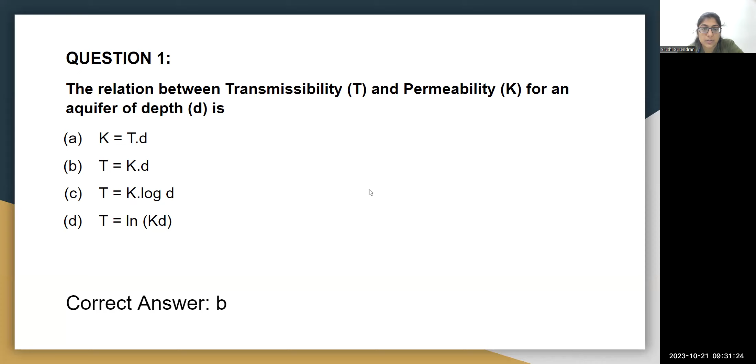You will have to focus on what is the definition of transmissibility. It is the permeability through a portion of the aquifer medium. When you consider the entire aquifer medium and take a portion of it, the capacity of that portion to transmit water is what is transmissivity. So the points of focus would be the definition.

You will have to learn this relationship between hydraulic conductivity and thickness of the aquifer, and also what are the units of this transmissivity component. Its dimensions are in terms of L square by T, where meter square per second, meter square per day, or meter square per hour can be the units.

So problems based on this will be coming, and the relationships also can come. The lecture is also focusing on the coefficient of permeability, which is nothing but hydraulic conductivity. So what is the coefficient of permeability? What are the factors that are impacting coefficient of permeability? Then, what is the permeability?

Permeability depends on the soil texture. So for different kinds of soil with different textures, what is the permeability in different soils, like sandy soil, clay soil, and also based on the arrangement structure of the soil - what is the permeability to different types of soil - is also one point of importance in week 5.

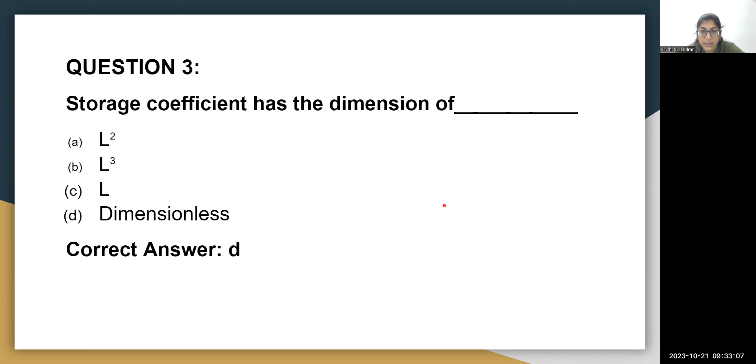Then another important concept is the storage coefficient or storativity. So what is storage coefficient, storativity? The correct definition is the volume of water that is drawn or that you can obtain per unit cross-sectional area of the aquifer per unit drop in hydraulic head.

So if you're taking it in meters, for 1 meter drop of hydraulic head and 1 meter square area of the aquifer, the volume of water that you can get is what storativity or storage coefficient is defined as. You should also focus on confined and unconfined aquifers - what is the storage, how is the definition changing?

Then another concept is the porosity, the amount of pores in the aquifer medium. What is the definition of porosity? What is the mathematical representation of porosity? What is void ratio, and what is the mathematical representation of void ratio? And the relationship between porosity and void ratio - these 4-5 concepts are very important.

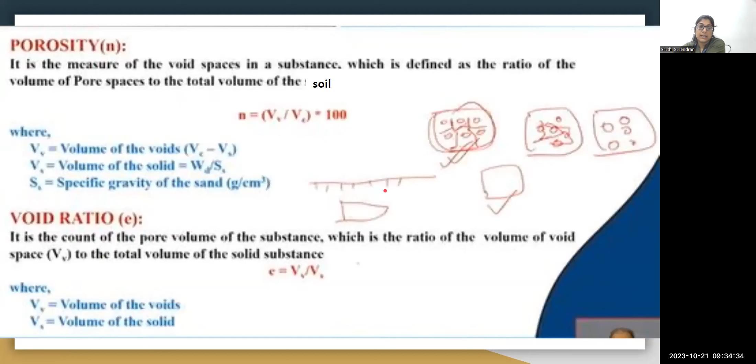The definition of porosity is the ratio of the volume of pores to the entire volume of the soil, whereas the void ratio is the ratio of the volume of pores to the volume of the soil particles alone, not the entire volume, but the soil solids alone. Porosity is represented by N and void ratio by E. How it is mathematically expressed is something you will have to focus on.

Then, what are the factors on which porosity depends? It depends on the shape of the particle, the packing of the particle, and also how well the soil particles are graded or sorted. So questions based on this can come, asking what it is depending on, what it is independent of.

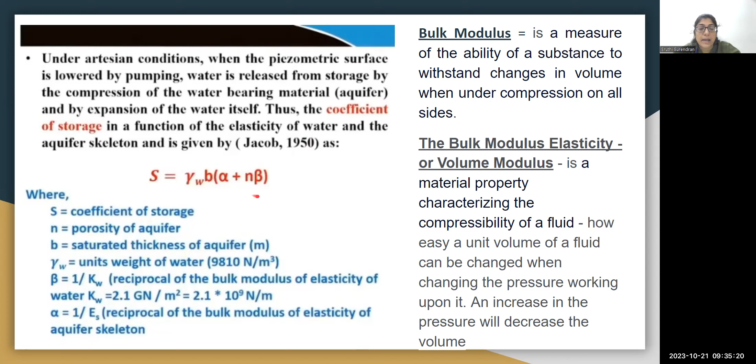Another part is the bulk modulus of compression that comes in connection with storativity or storage coefficient. The storage coefficient is given by a formula, and there are a couple of formulas that take care of storativity, with bulk modulus coming in relation to this equation. So it will be good to have an idea about what bulk modulus of compression is, and what are the values of bulk modulus of compression for different soil materials.

Then problems are a very important part of this chapter relating to transmissivity. They can give the transmissivity and ask you to find the thickness of the aquifer, or they can ask you to find the hydraulic conductivity of the aquifer, or they can ask you to find the transmissibility by giving the hydraulic conductivity and the thickness of the aquifer.

Then problems like these can also come where they'll ask you what is the relation between porosity and the void ratio. n is equal to e by 1 plus e; that is the relationship between porosity and void ratio. Then again, they can ask problems based on this formula. They can also ask you problems to find void ratio by giving the volume of the pores and the volume of the solid particles. So such problems can also come from this portion.

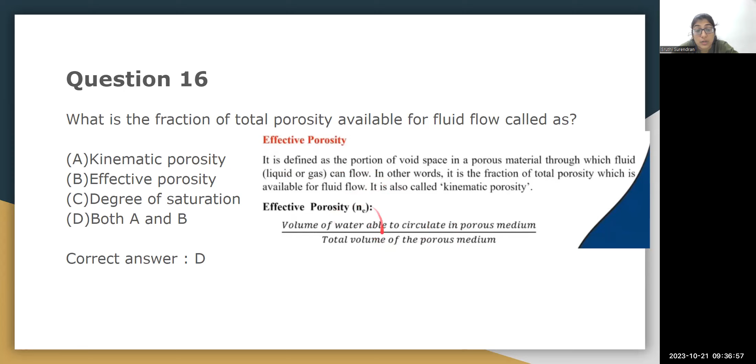Another concept is what is effective porosity, otherwise kinematic porosity. If you consider a part of the porous material, then what are the effective pores? If you consider from the total pores, what is the amount of pores through which water actually flows? That is the basic concept of effective porosity or kinematic porosity. So you will have to focus on the definition and these terms, kinematic and effective porosity.

Then again, how is the permeability varying according to soil texture and soil structure for different types of soil? For sandy soil, for clay soil, what will be the permeability? Will it pass through it easily, or is it not going to pass through it easily? Then there's a portion dealing with the types of permeability and averaging techniques of permeability. Then transmissivity, its definition, unit, relationship, and also problems, and the transmissivity definition in terms of confined and unconfined aquifer.

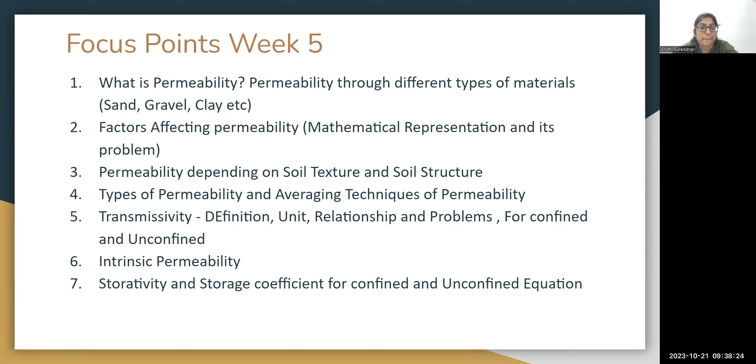Another concept is the intrinsic permeability, so you'll have to focus on that also. Then storativity and storage coefficient for confined and unconfined aquifers. So all these are the focus points of the week 5 lecture. You can use this as a guidance to help you study the week 5 portion.

Moving on to the revision points for week 6. Week 6 is covering portions relating to Darcy's law. What Darcy's law is, I think we have covered in earlier weeks' lectures. So what is Darcy's law? What is the validity of Darcy's law? Darcy's law is only valid for slow viscous flow where the Reynolds number is less than 1, that is, if the flow is laminar.

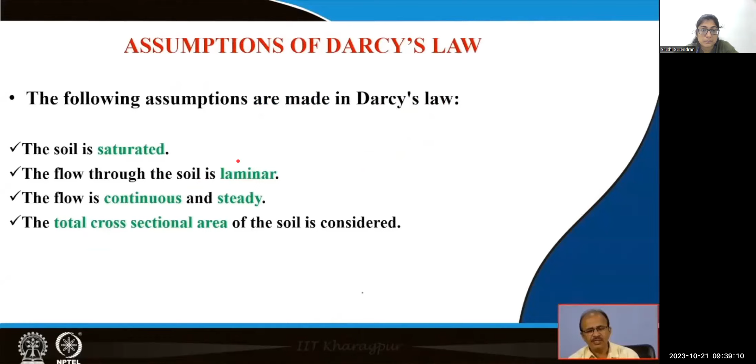So the validity of Darcy's law and the assumptions of Darcy's law are an important part of this chapter. So have an idea about the assumptions considered when we talk about Darcy's law. Such questions can come, asking for the validity of Darcy's law, what kind of flow it is valid for, what kind of Reynolds number it is valid for.

Then there are concepts covering the traveling time of the groundwater and the velocity of the groundwater flow. We know velocity of groundwater flow is given by Darcy's equation. The traveling time of water in groundwater flow is given by this formula: the length divided by the velocity, into porosity. Here the length is always considered in kilometers, whereas the velocity is considered in meters per day. So you might need to focus on the units of this equation.

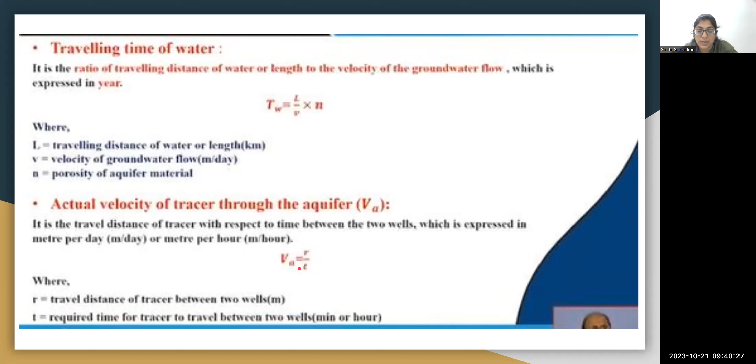Another important equation is the velocity of tracers through an aquifer. This is nothing but distance by time, the distance between two wells. Questions will come where they are passing a tracer between two wells. The distance between the two wells will be given, which will be r, and the time taken for the tracer to travel will be given, which is t, and we will be asked to find the velocity. So this is the type of question I was talking about.

If the distance is given and time is given, what is the actual velocity of the tracer? Then, yes, this is something we covered in the earlier week's lecture, week 5. This is the formula that I was talking about.

Another portion in relation to this, we learned what Reynolds number is in connection with Darcy's law. What is the mathematical representation of Reynolds number? It is inertia force by viscous force. And what is the formula? That is rho Vd by mu, where rho is the density, V is the seepage velocity, d is the grain size of the aquifer material, and mu is the dynamic viscosity. You need to be familiar with this formula and this representation. Questions and numericals are highly likely to come from this portion.

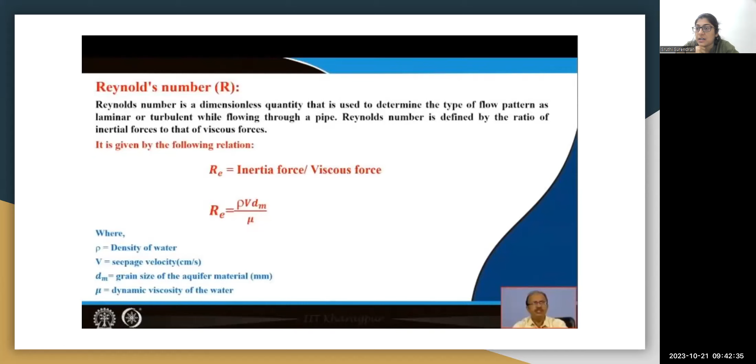Check the validity of Darcy's law for a flow where the dynamic viscosity is so, the seepage velocity is so, and the grain size of the material is this much. Such questions can also come.

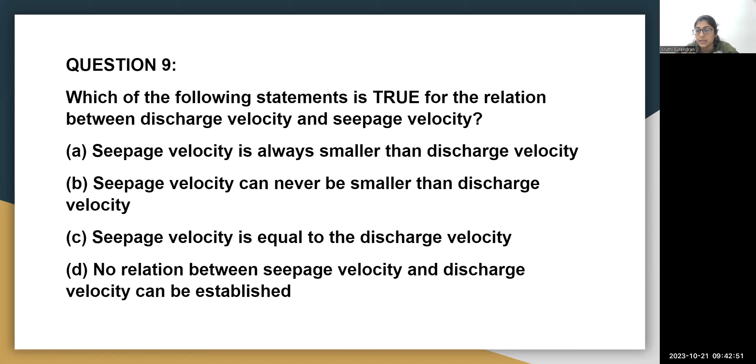Another thing in focus in this week's lecture is the seepage velocity. We know discharge velocity is computed using Darcy's law. Seepage velocity is the discharge velocity divided by the porosity. When we consider the entire cross section of the aquifer, we get the discharge velocity, whereas seepage velocity is the velocity of water flowing through a single pore or a connection of pores. So the seepage velocity is greater than Darcy's velocity because the cross-sectional area is smaller.

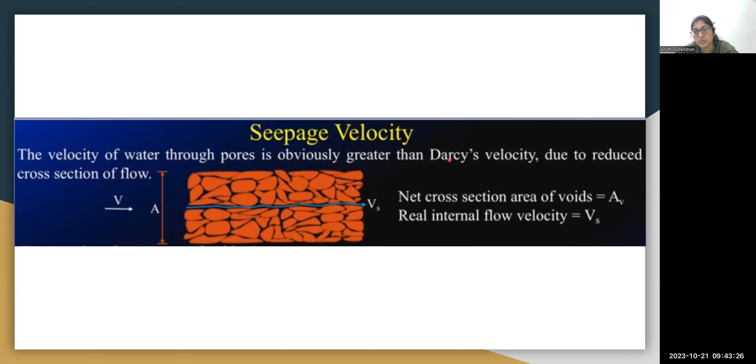Again, what are the coefficients of permeability for different types of soil? It ranges from 1 into 10 to the power minus 6 to 100 centimeters per second. So how does it vary? Even if you don't know the exact range, in what order it varies is something you might have to focus on in this week's portions.

Another important portion is the total energy of water. Total energy of water is the sum of the pressure energy, elevation energy, and kinetic energy. Pressure energy is the head of the water as a result of the pressure. Elevation energy is the height of the water column as a result of its position. And kinetic energy is the energy of the water as a result of velocity. So what is pressure energy? What is elevation energy? What is kinetic energy?

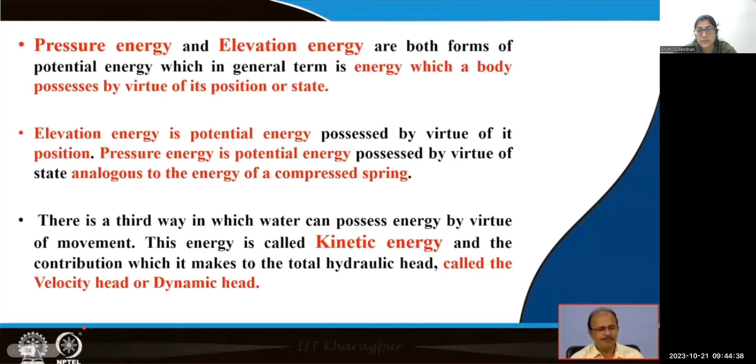Another thing is the other names for these. Elevation energy is also called datum head, and kinetic energy is also called velocity head or dynamic head. Pressure energy is also called pressure head. Questions like these: energy possessed by virtue of its position or state. By virtue of position, it is called elevation energy, and energy possessed by virtue of its state is called pressure energy. This is the mathematical representation of the total energy of water in terms of head.

Kinetic energy is given by V square by 2g. Pressure energy is given by P by rho g, and elevation energy or datum head is given by Z, which is the elevation of the water, I mean, the bottom of the water body. If you're considering a total height of h, the level of the water at the bottom from the mean sea level will give us the elevation energy.

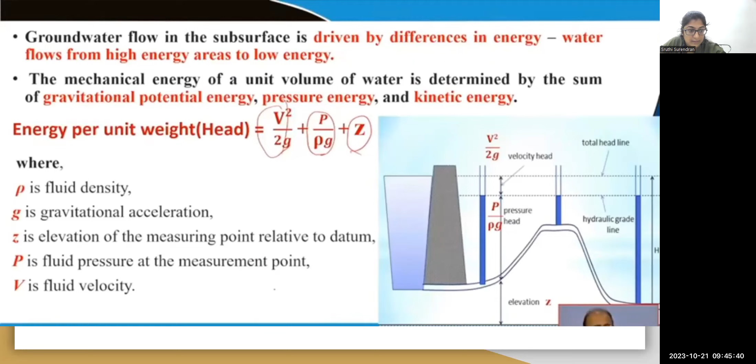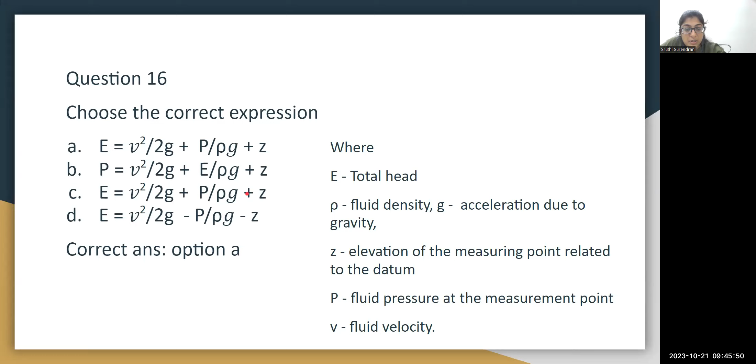So questions like this will come where they are asking you to choose the correct expression for total energy of water. Now, another portion in connection with this is the hydraulic head. Now we learned about pressure head, elevation head, and kinetic head. Hydraulic head is nothing but the sum of the pressure head and the elevation head together. So let's go back and talk about hydraulic gradient.

Hydraulic gradient is nothing but the change in the hydraulic head divided by the length of the flow. So you have to know what is the difference between hydraulic head and the pressure head. Hydraulic head is a sum of both of this. Pressure head will be just this.

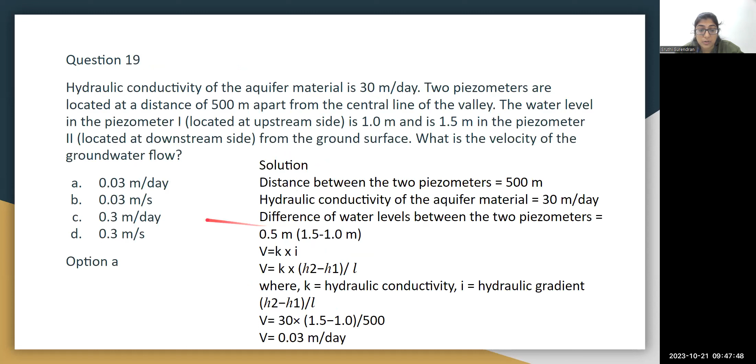And also problems relating to traveling time of water. They have given the porosity and the distance, and asked us to find the traveling time. So here the velocity was found out earlier from this question, and in continuation with that, we have been asked to find out the traveling time. So another important thing is this 30% should always be converted to 0.3, and also take care of the units.

Like I said, for traveling time, normalize all the units, bring it to one unit, kilometers to meters. If they have asked in years, make sure that the velocity component, which is giving us meter per second, is converted to meter per year.

Again, we talked about what is intrinsic permeability in the previous chapter. So again, what is intrinsic permeability? It is nothing but C into D square. D is the grain size, and C is representing all the other factors on which the permeability depends, that is the geometrical properties of the porous media.

And Darcy: this K expressed in centimeter square is very small. So there is a unit exclusively for this, which is called 1 Darcy. So what is the relation between the Darcy and centimeter square, and what is the relationship of intrinsic permeability with coefficient of permeability, are two very important factors that you will need to focus on.

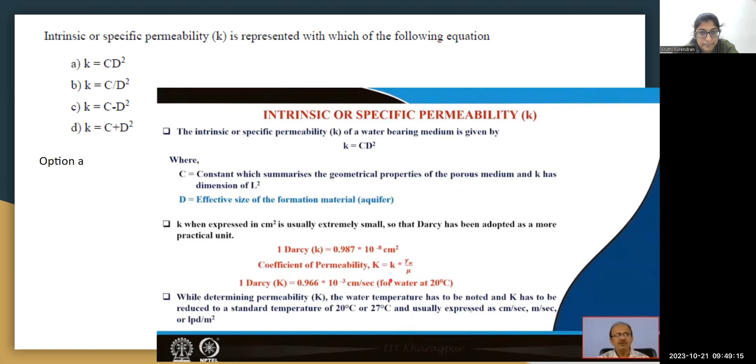So summarizing this week's focus points, it will be water movements. What is hydraulic head? What is pressure head? What is kinetic head? Datum head? What are the factors affecting permeability? Velocity of water during groundwater flow, as well as seepage velocity, the travel time of tracer, the actual velocity of tracer. All the formulas and problems are important.

Then Darcy's law, validity of Darcy's law. What is the mathematical representation of Darcy's law? What are the assumptions in Darcy's law, and the problems related to Reynolds number are important. Then there are empirical formulas to find out the groundwater velocity. You can go through the lecture material for that.

And also confined and unconfined aquifers, problems relating to finding the discharge through aquifers. What is the value of drawdown? What is the radius of the well? What is the radius of influence? Etc. So this portion is being covered in next week's lecture also. So we'll just see what all are that. Even in this chapter, there are portions talking about the 6th point.

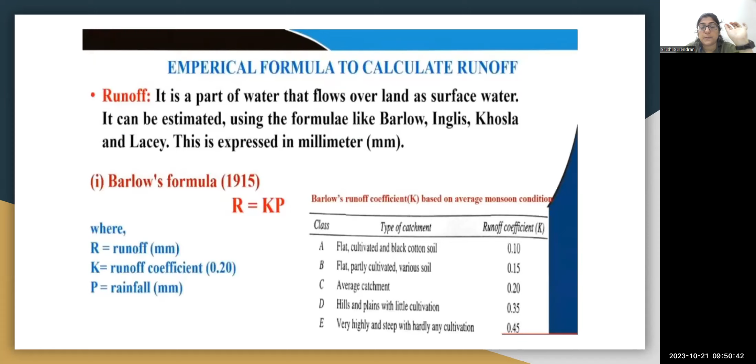So moving on to the 7th week, they're focusing on some hydrological components like the runoff. So what is runoff? What are the empirical formulas to calculate runoff? Formulas like Barlow's formula are all empirical formulas. So special focus on the units. Barlow's formula, Inglis's formula, Khosla's formula, Lacey's formula. Be familiar with all of those, and also the units in which all the quantities are represented.

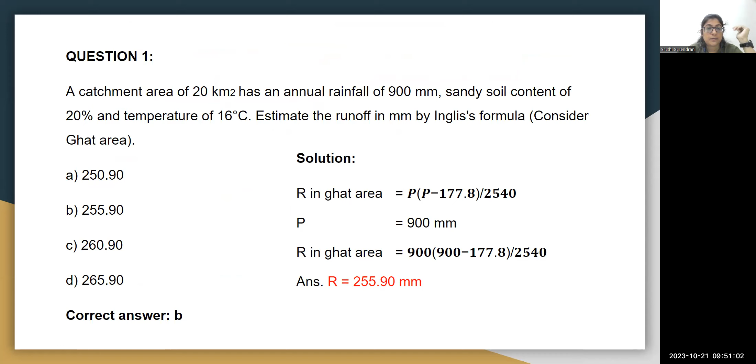Problems can come from this, asking you to estimate using Barlow's formula or Inglis's formula by giving the respective data. Then this was what I was talking about. You need to have an idea about what is drawdown. Drawdown is the height of the actual water table from the initial water table, from the initial water table to the present water table.

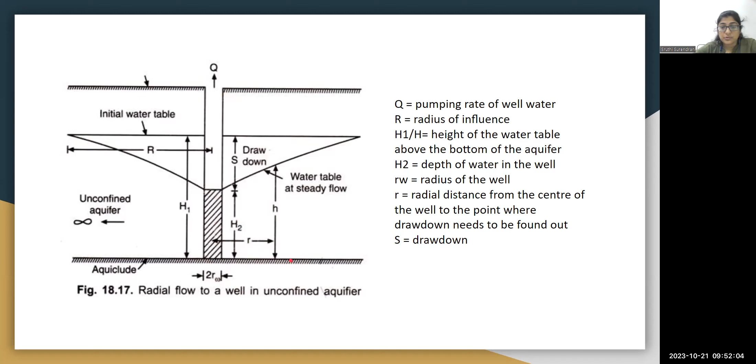Then what is radius of influence? What is the total height? What is the pumping discharge rate? Where is the radius of the well coming, and the distance of the center of the well from another well will be provided. So that value is going to be small r.

So here is a problem that can come in relation to it. They'll give you the radius of the well. They will give you the distance of a well from the center of the pumping well, another well from the center of the pumping well, which are R1 and R2. They'll give you the height of the water level, actual water level.

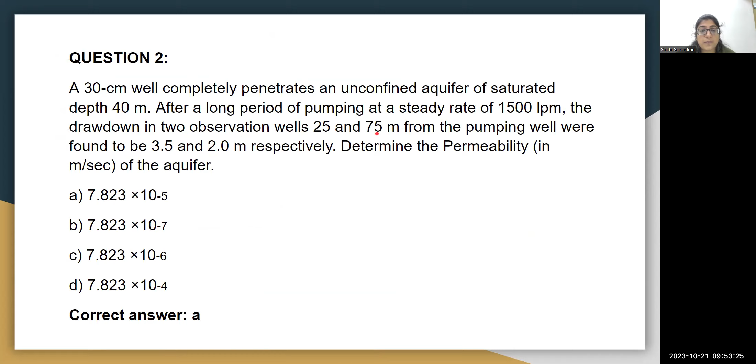This is for unconfined aquifer. For confined aquifer, the formula is different. So please be familiar with this concept. A problem relating to this is pretty sure to come. So this is the kind of problem that can come. The discharge is given, drawdown is given, the distance of the observation wells are given. They have asked to find the coefficient of permeability.

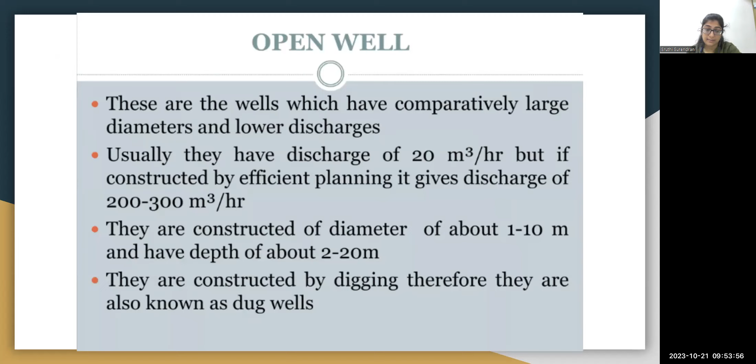Another important point of focus in this week 7 is the different types of well. What is a well? What are the classifications of well, open wells and tube wells? What are the discharge rates and the diameters and depths of open wells generally? What is the classification for open well, shallow open well and deep open well?

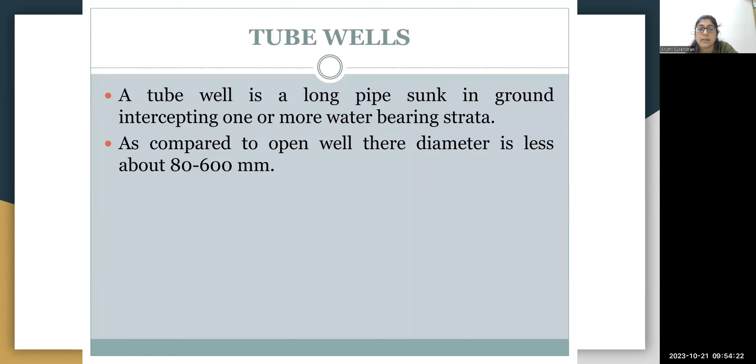What is the shallow open well? Shallow open well is when the well ends in the water bearing strata itself, and deep open well is when it ends in the impervious strata called mota layer. Then again, what are tube wells? Generally, what is the discharge in tube wells? And what is the diameter of tube wells?

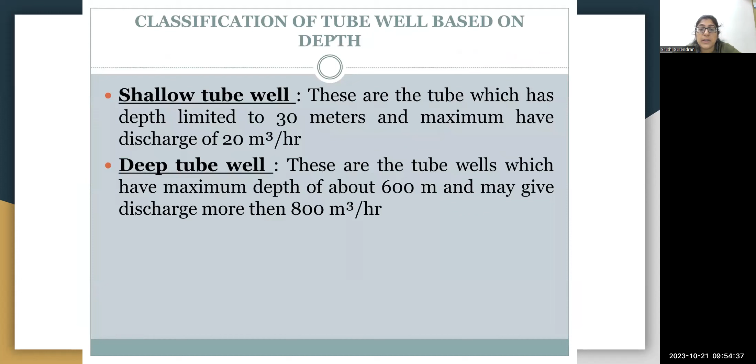What are the classifications of tube wells, shallow and deep tube well? Again, what will be the discharge for shallow and deep tube well? What is going to be the depth of shallow and deep tube well? Have in mind all these values. Also, there are other types of well like bored well, driven well, and jetted well also talked about. So have an idea about what they are; the dimensions of the diameter and depth will be something that you might need to go through.

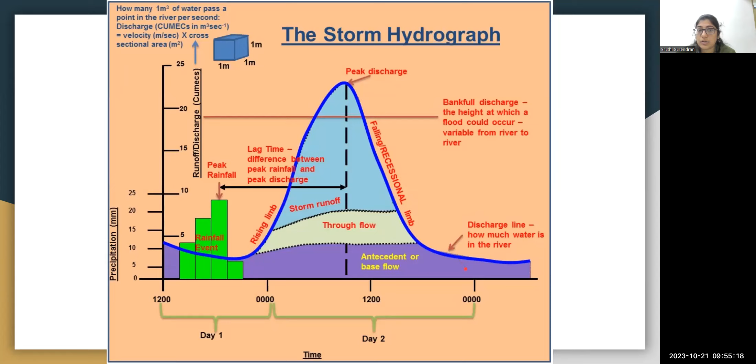The next concept in here is what is a hydrograph. Hydrograph is the discharge versus time graph, which is helping us estimate the direct runoff. And hydrograph has got various components like rising limb, peak discharge, falling limb. All that is given in the lecture series, so please do go through all that. Questions like what is this plot called can come.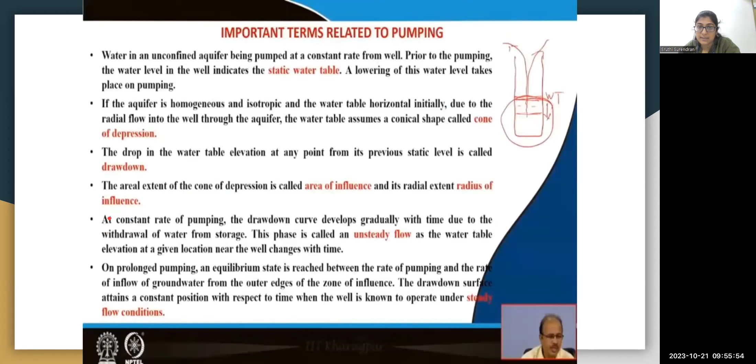So again, week 7 focus points are runoff, empirical formulas for the estimation of runoff, hydrograph components, types of wells and the specifications, and the steady flow in confined and unconfined aquifers. Week 6 and week 7 both have topics related to it. So these are the focus points in these week 7 lectures.

Now moving on to the 8th week's points. The 8th week is covering portions related to rainfall. So what is precipitation? What are the different types of rainfall classification? What are the different types of precipitation classifications? It can be snow, it can be rain, it can be sleet, hail, whatever.

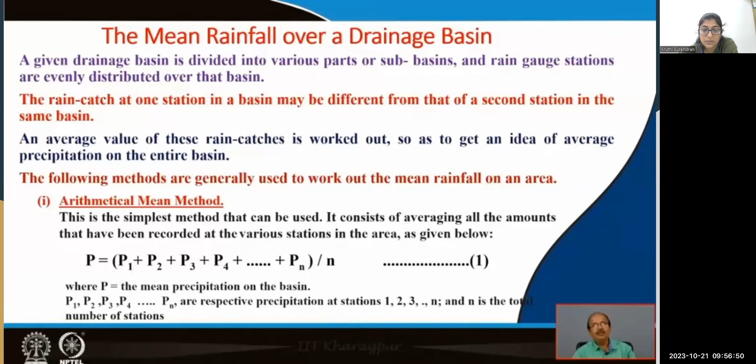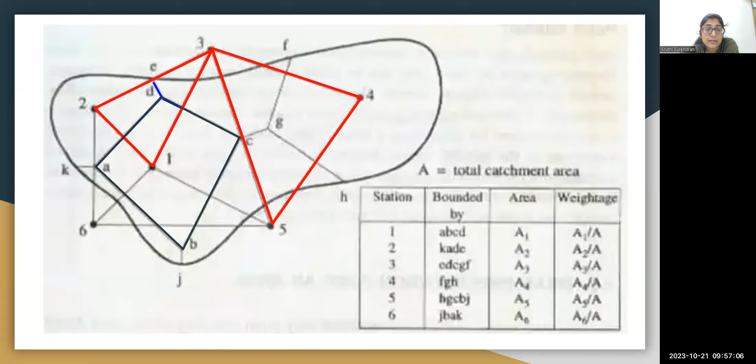So one portion that is majorly covered here is how to estimate the mean rainfall over a basin, using 3 methods: the arithmetical mean method, Thiessen polygon method, and isohyetal method. If you have access to these slides, you can see what the Thiessen polygon method is and what the isohyetal method is. Out of these 3 methods, which is the best method, you'll also have to know. Then problems relating to this can come, like which is the most accurate method, and they can give you 4 or 5 rainfall values, the areas between isohyets, and ask you to find out the mean rainfall.

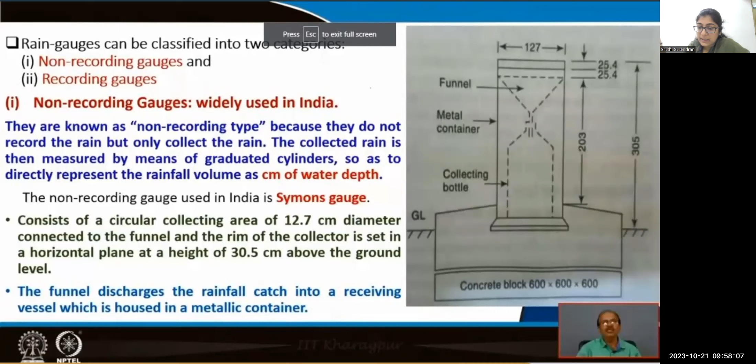Another important portion is the gauges, that is measurement by gauges. That was empirical equations to calculate the mean rainfall, average rainfall. Here they're talking about how to measure rainfall. So there are 2 major types of rain gauges: recording gauges and non-recording gauges. Symons gauge is the non-recording gauge that is talked about in this. And what are the specifications of it? The diameter, the funnel that is used for collecting the water, the collecting bottle, all that.

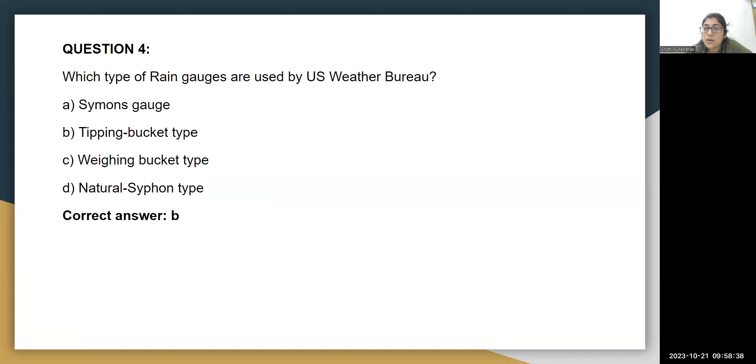Then the 3 types of recording gauges: tipping bucket, weighing bucket, and natural siphon or floating type. So what are all those? What is a tipping bucket? What is the floating recording type? What is a weighing bucket type? All of this is important that you go through. They can ask you questions like where it is used and in which kind of rain gauge recording is possible. All of these recording gauges make a record of the mass curve of the rainfall, that is accumulated rainfall. This is about the weighing bucket type, and this is about the natural siphon type.

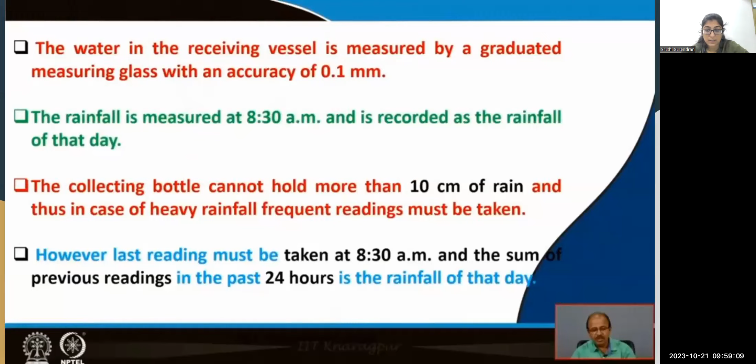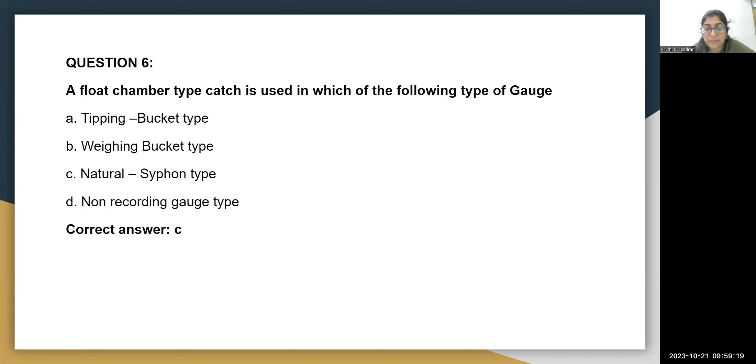Now, another important point is the period of measurement of rainfall when it comes to non-recording gauges. It is taken at 8:30 a.m. From 8:30 a.m. one day until 8:30 a.m. the next day is how the rainfall is measured. The 24 hours of rainfall for that day is measured in this way. So questions related to these recording gauges are sure shot. There is at least one question going to come from that portion. So have an idea about it.

Another portion that is being covered here is what an average annual rainfall or normal annual rainfall is. When we take it for 1 year, it is called annual rainfall. When you take it for 30 years and find the average of all the 30 years' annual rainfall, we call it average annual rainfall. That is one standard value with which all the other rainfall, small time series, that is daily values or annual values, are compared. So average annual rainfall or normal annual rainfall is the rainfall taken for a period of 35 years or 30 years. Based on this you can find the index of wetness, which is nothing but the ratio of the annual rainfall to the average annual rainfall.

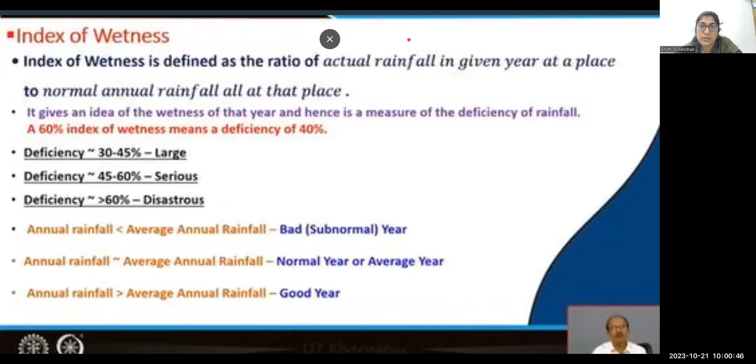So based on the index of wetness, we can find out if a year is a good year, a bad year, or a normal year, because if the annual rainfall is less than the average annual rainfall, then this will be the representation of that year in terms of rainfall. Also, deficiency can be found out. So this is another important concept here, the average annual rainfall, also called the normal annual rainfall. Okay, and index of wetness is a quantity that is used in relation to this average annual rainfall. So questions like this can come based on this data over here. This is one question that is discussed.

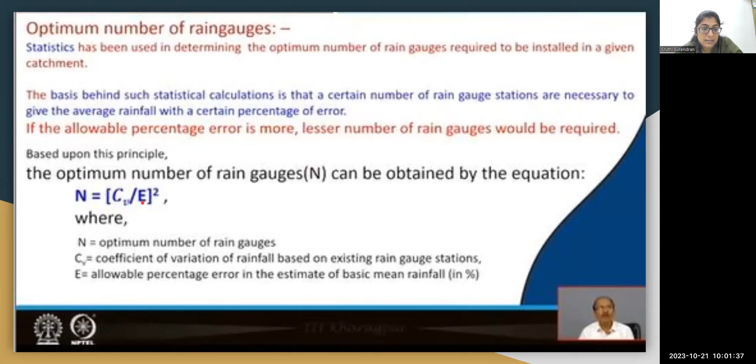And they'll ask you to find the optimum number of rainfall gauges. The question will be like this. They'll give you a certain amount of gauges. Now, how many more gauges should be placed there? So if the optimum number of gauges is 9, and if only 5 rain gauges are there, then 9 minus 5, 4 more rain gauges has to be placed there.

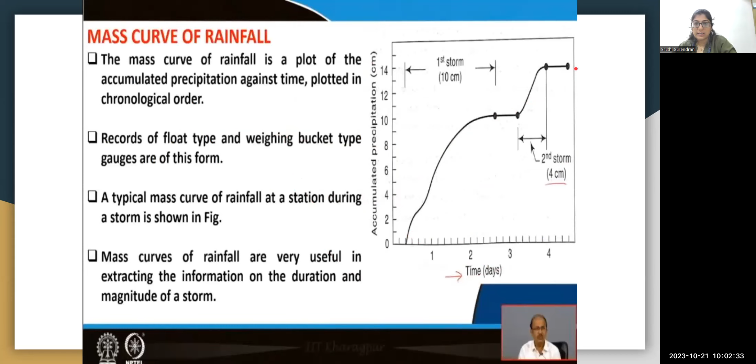When the actual rainfall is greater than the actual infiltration rate, what will be the infiltration capacity? Or the actual rainfall is less than the infiltration rate, what is going to be the infiltration capacity, and how is runoff related to this is one important part of this week's lecture.

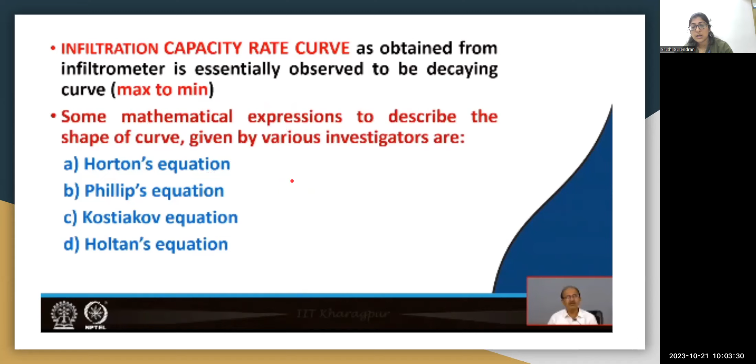So there are various equations that are used for computing infiltration rate: Horton's equation, Phillips equation, Kostiakov equation, Holtan's equation. You can study the equation. Problems can come relating to that. This is Horton's equation.

So summarizing, week 8's lecture is covering what is rainfall, what are the different formations of rainfall, that is orographic precipitation, cyclonic precipitation, what is all of that. What are the different forms when the rainfall's intensity, what is it, light rain, heavy rain. Then based on the size of the drops, what rain is it? Is it a drizzle or it is a big droplet or whatever? All of that is covered in this portion.

Measurement of rainfall, we saw recording, non-recording gauges. Estimation of mean rainfall, we saw arithmetic method, Thiessen's polygon, and isohyetal method. Estimation of missing rainfall is some portion I think we didn't cover, but do go through that. Then index of wetness and normal rainfall.

Design of rain gauge network, we checked that table. Then the optimum number of rain gauges is one important part. Infiltration: what is infiltration, infiltration capacity, the relationship between infiltration and rainfall intensity, infiltration equations.

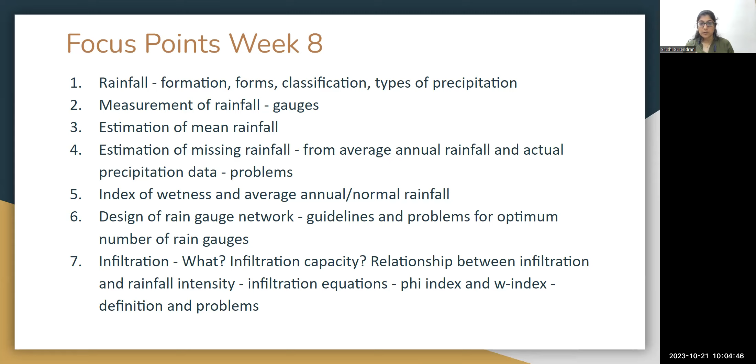Another thing we had discussed during the problem sessions as well is the phi index and the W index. So what is phi index? What is W index? What is the formula? Problems. All this do go through.

Moving on to the 9th week, it is covering about groundwater recharge techniques. So groundwater can be recharged naturally, artificially, or induced recharge can be given.

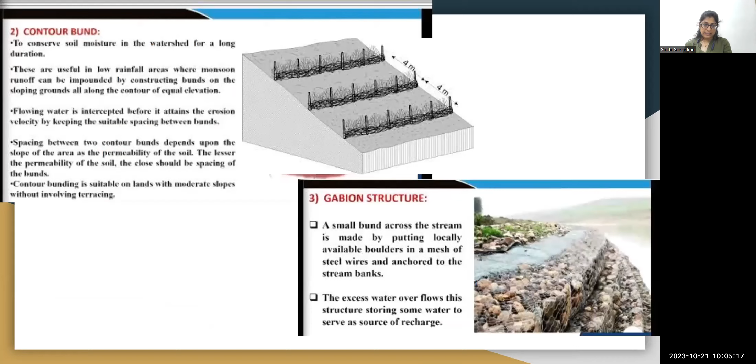So in this portion, firstly, they discuss about natural ways to recharge groundwater through gully plugs, contour bunds, gabion structures. What are all of these? You should have an idea, because they'll give a description of that and they'll ask you what kind of natural recharge technique is it. Is it a gully plug? Is it contour bund? Or is it gabion structure, or is it a check dam, groundwater dams, or dug well recharge? So these are some natural ways to recharge groundwater.

Here, which of the following is constructed across small streams having gentle slope? It is check dams. So do go through what are these structures and where they are given.

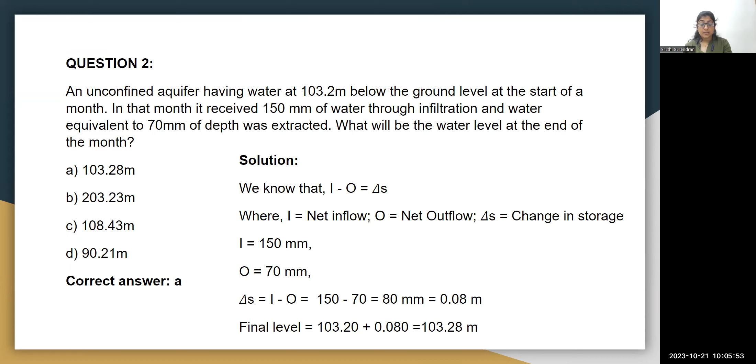Then another question is the groundwater recharge estimation through 2-3 methods: one is the groundwater balance method, rainfall infiltration method. So problems relating to that can come. You can be familiar with the formulas: groundwater level fluctuation method, groundwater balance method, and rainfall infiltration factor method to estimate groundwater recharge, not groundwater flow, groundwater recharge. So problems relating to that can come. This is one such example of the problem.

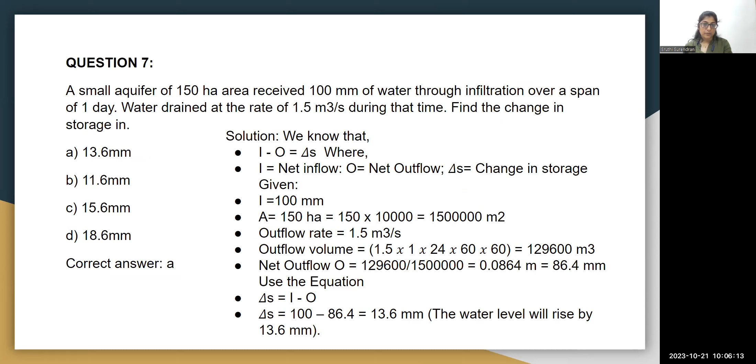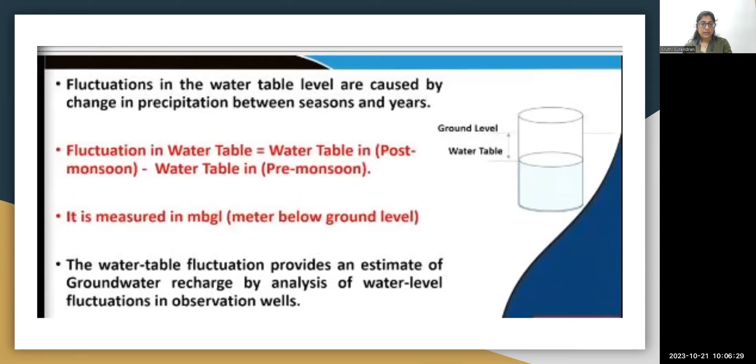Another example of the groundwater level fluctuation method. Another concept covered is what is this fluctuation? It is the water table in the post-monsoon period minus the water table in the pre-monsoon period, measured in meters below ground level. Questions relating to that were also discussed.

Then about what are the groundwater resources in a country, which administrative unit takes care of the assessment of groundwaters. It is the Central Groundwater Board as well as the boards in the state governments. What is the total annual groundwater recharge? What can be extracted? What can be used? How much is used for irrigation and domestic purposes? This portion always has a question from it, so do be familiar with this portion.

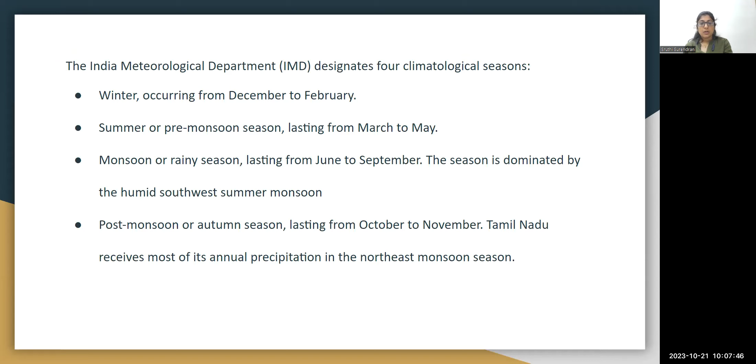Then again, what are the rainfall seasons in a country? The southwest monsoon and the northeast monsoon. What is the period of those rainfalls is also important to know. We have winter, summer, monsoon, and post-monsoon. Winter is generally from December to February. Summer is from the middle of March till May. Monsoon is from June to September, and post-monsoon, the autumn season, is from October to November.

What is the calendar groundwater year? It is 12 calendar months beginning with the commencement of the predominant monsoon. So what is a groundwater year? What does groundwater assessment year mean?

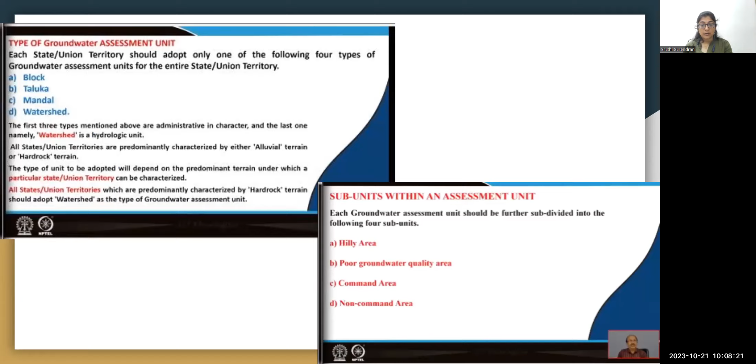Then what are the types of groundwater assessment units? It's divided into block, taluka, mandal, and watershed. Then what are the subunits? Again, hilly area, poor groundwater quality area, command area, non-command area. What are all these subunits? You just need to have an idea about what all these terms mean.

And again, the categorization of the command and non-command area is under safe, semi-critical, critical, and overexploited. So what are all these is something you might have to focus on. We discussed all about groundwater resources in India, natural ways to recharge, estimation of groundwater recharge through three methods, groundwater assessment units, subunits, and its categorization.

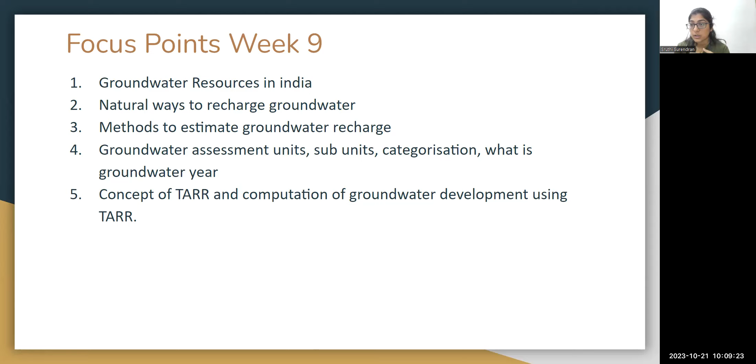Another concept covered in the week is TARR, total annual replenishable recharge, and computation of groundwater development using TARR. So what is TARR? There are 6 steps or so in computation of total annual replenishable recharge. In that, they ask how to find the net draft, how to find the groundwater development. There are small formulas for all that, so you can focus on that as well.

Moving on to the 10th week. The 10th week covers groundwater management techniques like scientific management of groundwater resources, classified into supply side and demand side. So what are supply side measures? It takes care of the supply of water, what is the maximum quantity of groundwater we can extract without affecting its availability or affecting the resources. Demand side takes care of preserving, protecting, and controlling the amount of water provided.

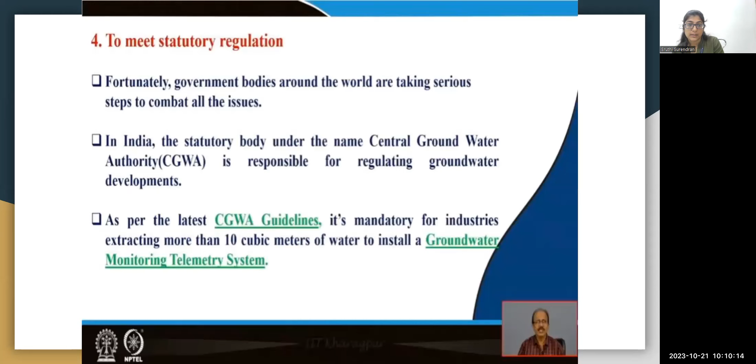So what are the objectives of supply side measures? There is also the portion covered on the need for groundwater management techniques, so questions related to that can come. Then, what are the major sources?

Another important area is the watershed classifications. What is a watershed? What is a sub watershed? What is milli, micro, mini watershed based on area? They'll give you the area and ask which of this is micro, which is mini, which is sub watershed.

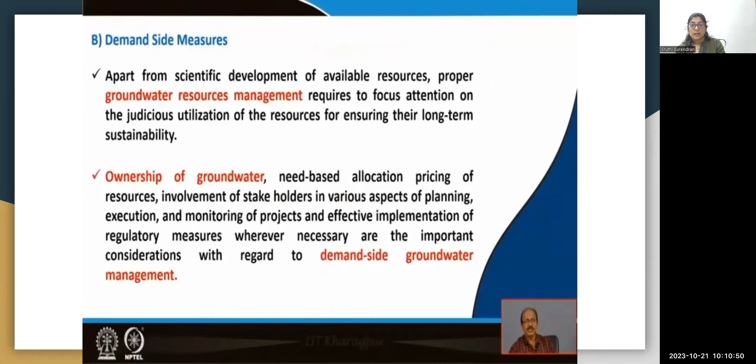So here again, what are the demand side measures? It is ownership of groundwater involving stakeholders, proper monitoring and implementing, proper pricing of water. All these are demand side measures. They'll ask about all of these and say what kind of measure it is - a supply side measure or a demand side measure?

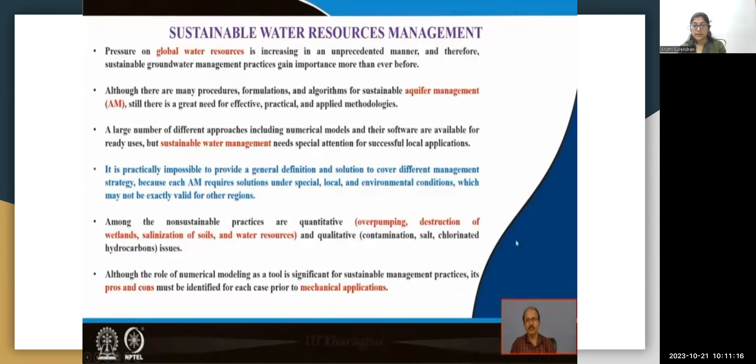Then again, another term introduced here is sustainable groundwater resource management. What is sustainable resource? What are non-sustainable practices? What are the practices that come under non-sustainable practices? You can go through it, questions related to that can come. Then these are some of the questions coming with respect to sustainable use of water.

Then another portion covered here is management of groundwater through artificial recharge, or what are the different techniques of management of groundwater.

So we studied about scientific measures in management of groundwater. How can groundwater be managed? Through artificial recharge, conjunctive use of surface water and groundwater, interbasin transfer, intrabasin transfer, indirect or induced recharge, and control wells. These are some methods in which groundwater management can be implemented, so you can go through all of that.

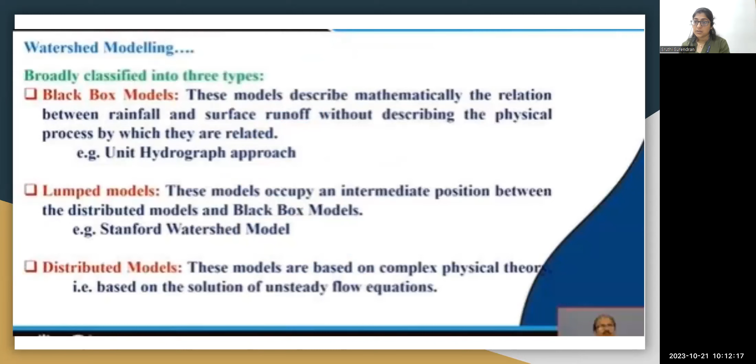Then what is watershed modeling? What are the classification steps involved in watershed modeling? What are the classifications of watershed models and examples of it? Another concept covered is the integrated watershed management approach - what is the concept, what are its objectives, what strategies are adopted in integrated water management. Go through all of that, a question is likely to come from that.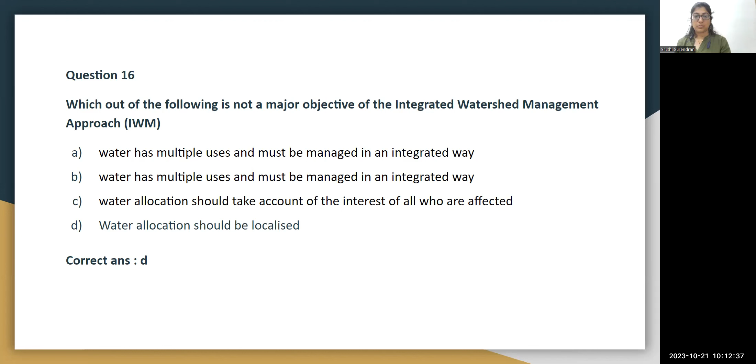So there are a lot of questions being discussed in the problem solving session as well as in the assignments that are covering these portions. So do go through the questions for that.

So the focus points of week 10 are these: what is the need for management, the challenges, common goals, what is scientific management of groundwater resources, the supply side measures and the demand side measures. Then what is watershed, the watershed classification and modeling, integrated watershed management.

Then groundwater, different methods of groundwater resource management techniques. What are the different stages of groundwater management development and management techniques? That is, we have the baseline, incipient stress, critical stress periods, and also at what time what kind of management or development technique is suitable for what kind of situation.

Baseline is when water is fully available to meet all requirements. Incipient stress is when water is available, but there are some small conflicts regarding groundwater. So based on the stress conditions, there are stages of groundwater management development - that is also something you might need to go through. Then sustainable, non-sustainable water resource management technique is another area of focus in the week 10 lecture.

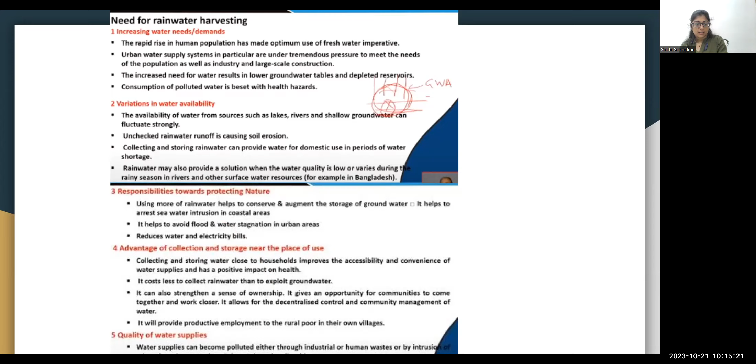Okay, so we were talking about the 11th week's lecture. In this 11th week, what is the need for rainwater harvesting? Why we are implementing rainwater harvesting is one portion. Then another one is what are the uses of rainwater? How can a rainwater harvesting system be implemented, and in what all ways can we use the water?

Then what are the components of a rainwater harvesting system? It has a catchment to collect the water, a delivery system to transport the water, and a storage system to store this water and then distribute it accordingly. A more detailed explanation of the components includes the first flush, the filtration system, and all this - details about the entire thing are given.

What is catchment area? What all can be used as the catchment area? What are the systems of transportation? What is first flush? What are filtration systems? There are sand filters, PVC pipe filters - so what are all these? What kind of materials are used, and for what area is this used, is important.

Here is one question: a 6 inch pipe is enough for 1,500 square feet, an 8 inch pipe is required for area more than 1,500 square feet. So questions relating to that can come.

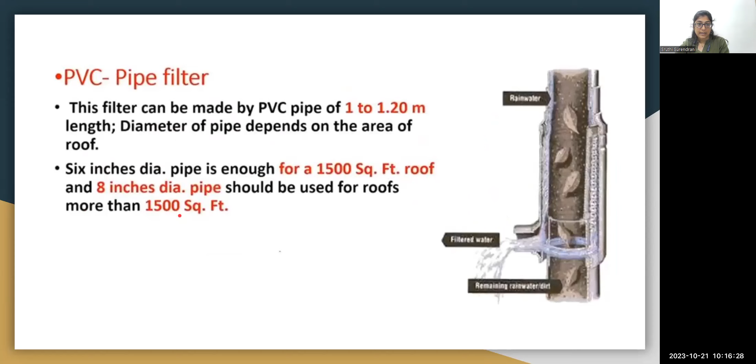Then again, methods of artificial groundwater recharge. In week 10, we had looked at natural methods of recharge. Now, in week 11, we are entering into artificial groundwater recharge. One of the methods is through rainwater harvesting - that is, building structures so that groundwater can be recharged.

It is divided into two methods: direct and indirect. Indirect is induced recharge, that is, we are creating a situation where streams will provide water into groundwater. Direct recharge is through construction of structures that will collect surface water and recharge the groundwater, or subsurface structures that will help in recharging groundwater.

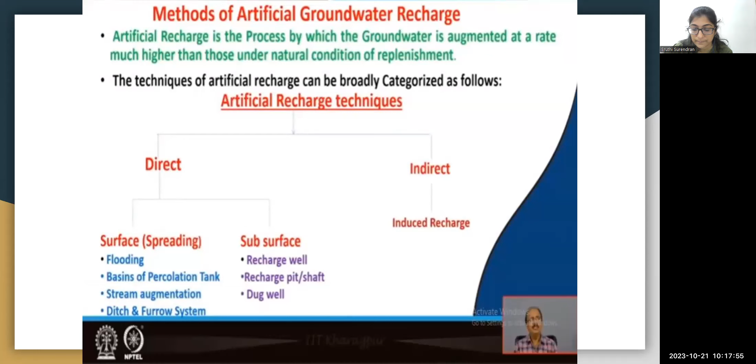So these are some broad classifications of artificial recharge, and all the details have been given about surface recharge techniques through stream augmentation, ditch and furrow system, basins, flooding, what is a recharge well, what is a dug well, what is a recharge pit or shaft, and where it can be constructed. All of that specification has been given, so you will definitely have to go through it. This is what I was talking about - induced recharge.

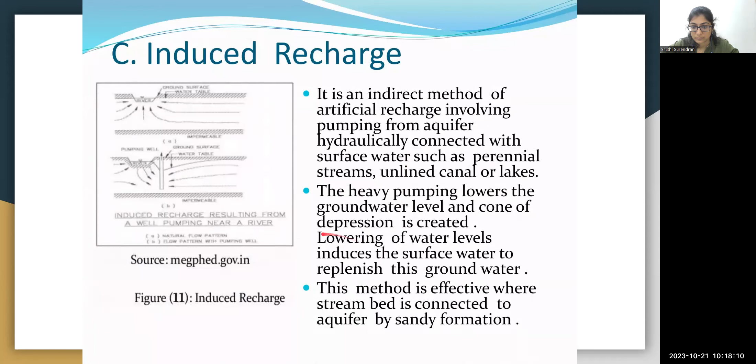Okay, so that, okay, then

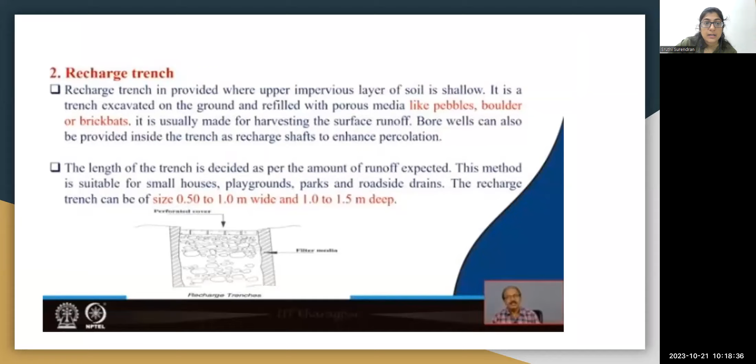Again, like I said, what are the different types of recharge structures that can be constructed? Recharge trench, recharge pits, recharge pits and shaft. All these are the specifications of it. What should be the depth? What should be the width? What kind of areas these are used for is something that you will have to study and remember.

Then what are the different sources of water for recharge? You can collect water from rooftops. You can collect water that is flowing down paved and unpaved areas. You can collect water from water bodies, stormwater drains, etc. So that is another area of focus.

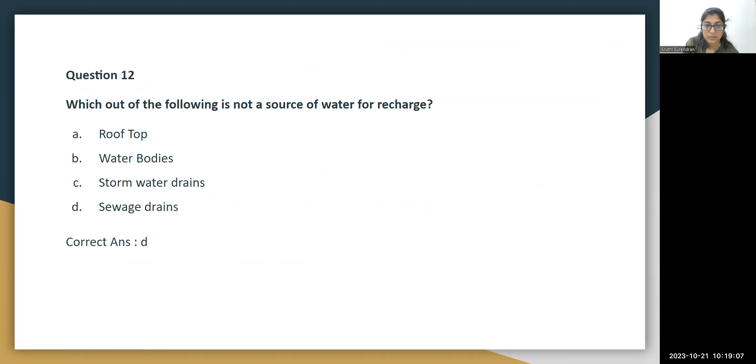We discussed the components of rooftop harvesting. What is first flush, what is the storage system used, what are the filtration systems used. So all of these are what is majorly covered in week 11.

Then what is artificial recharge? We say artificial recharge, we say natural recharge, but what exactly is artificial recharge? Artificial recharge is the process by which groundwater is augmented at a rate higher than the natural percolation. So in an area, if there's natural percolation of water happening, then artificial recharge is going to add water to the groundwater at a rate which is higher than its natural percolation. Otherwise, it is not called artificial recharge.

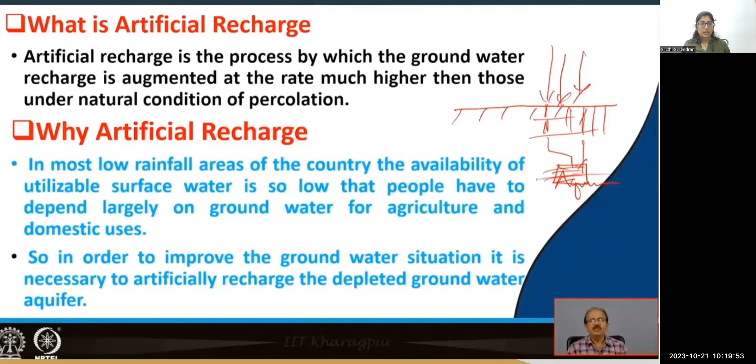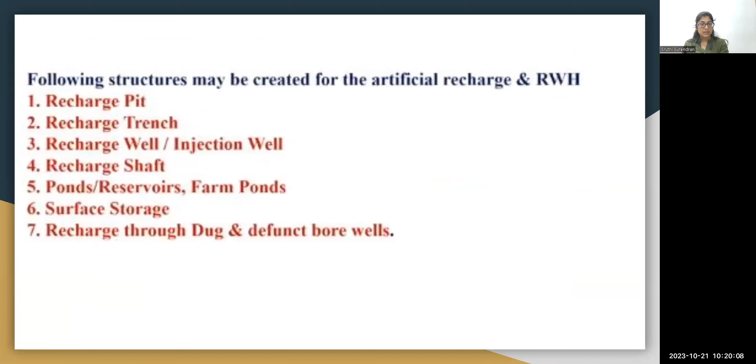So, in which regions it is important, and what are the techniques that can be used for artificial recharge? Here, there are a lot of structures that can be used for artificial recharge as well as rainwater harvesting. So, do go through all of that in detail. Where is a recharge well or an injection well provided, when the aquifer is shallow or when the aquifer is deep. All these are important points.

So the focus point of week 11 would be rainwater harvesting. What is its need and what are the different components? One method of rainwater harvesting is rooftop harvesting. So what are the components of rooftop harvesting? Then what are the sources from which you can do rainwater harvesting? Like I said, rooftop is one method in it. Then what are the components of rooftop harvesting?

What is artificial recharge? What are the methods of artificial recharge? What are the structures that can be used for artificial recharge and rainwater harvesting? This entire chapter, this entire week, is focusing on that. So do go through it.

Lastly, when we come to the 12th week, this was recently taken last week, so I didn't put it in the slides. This is majorly focusing on what is global warming, what is greenhouse effect, what are the greenhouse gases, then what is the potency of greenhouse gases with respect to carbon dioxide, what is the effect of global warming on water resources. We saw how increase in temperature is going to change the chemical and physical composition of water.

How is it going to result in ocean acidification? How is it going to impact corals? All these are some impacts that we had looked into. It is going to change the physical and chemical composition of coastal areas, the sand, the water in the coastal areas. So these are some points that you'll have to focus on. What is the effect of climate change on groundwater resources? This is another important area in week 12.